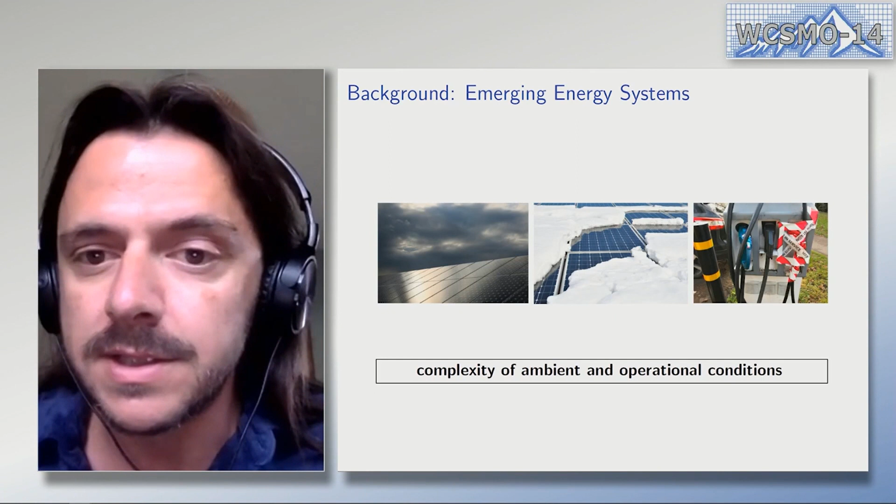But let me focus a bit on the complexities here. The complexities associated with these systems, first of all, are complexities related to ambient and operational conditions. You can think about solar panels that are not completely deterministic, very volatile, and can be affected by weather. And of course, equipment that is out there in the field, such as electric vehicle charging stations that can go out of operation.

The second complexity category is actually the size. If you think about the power network itself, the power network didn't change for a hundred years. But what changed is actually the number of control points in this system. So if before we had maybe thousands of big power plants that we had to control, now we suddenly have to control millions of all these devices that are out there. So size in terms of the number of control points, or optimization variables if we're talking about optimization.

The other types of complexities are related to interactions between different systems or subsystems. You can think of physical systems such as wind farms, where turbines affect each other because they appear in the way of the wind, and the wind comes in different ways to different wind turbines in this wind plant. But we also have interactions with logical systems and with societal systems associated with energy systems.

And in the context of all these complexities, the main research question that we at NREL in my group are trying to answer is how you can control and optimize all these massively deployed edge devices or distributed energy resources in real time. And if you want to read some high-level thoughts and description of this research, you can read this recent article in IEEE Power and Energy Magazine last year.

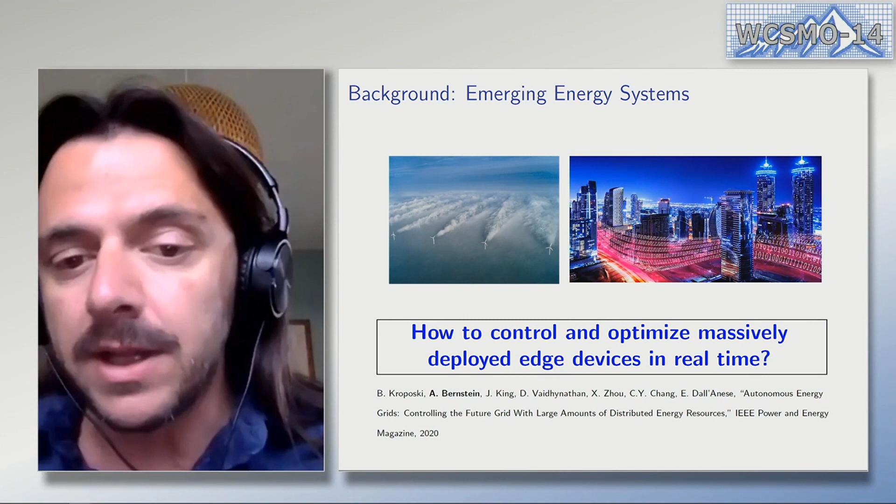But what I will focus on in this talk is really the mathematical foundations related to optimization of such systems. I will start with a really abstract description of the problem, but I will connect to energy systems. I will also be happy to hear thoughts about connections to other systems, because the methods that I will present here are actually general and they apply to any complex system, network system.

So let me start with some mathematical notation that I will use throughout. Consider a general system that can be described by just an input-output relationship like this, where Y is a vector of system outputs, X is the vector of controllable inputs, and the mapping H maps inputs to outputs. In this case, I assume it's a time-varying algebraic map. This can also be extended in general to dynamical systems, but I will focus here only on a simple algebraic relationship between input and output.

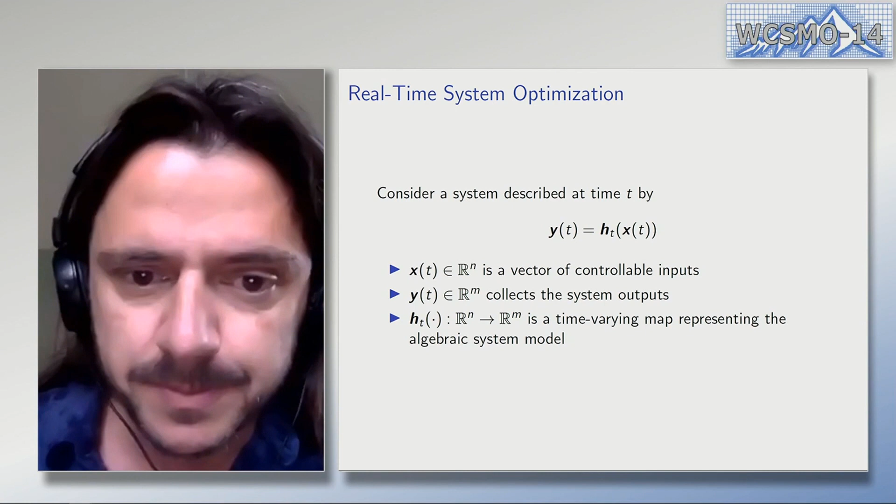To connect to power systems specifically, this is very high level, even for people that don't know anything about power systems, I can give a bit of high-level background here on what a power system is.

What I show here on the left is actually the network, a distribution network, what we call in the power systems world. And this is a power network that delivers power to the customers in the neighborhood, for example, right? So here at the head, at the top, you have a substation that transforms power from high voltage to low voltage. And then the power is delivered to the customers, and each node in this network represents, for example, a house in your neighborhood. Okay, so this is a graph that represents a neighborhood and a distribution network associated with it.

And in this network, you can think that you can have houses with solar panels, electrical vehicles, smart appliances that can both consume and generate power, right? So this is the world of new energy systems where the energy can be generated on the edge of the system, compared to the previous classical power systems world where these systems were completely passive, they were just consuming power.

And in this context, if we want to connect to the mathematical formulation of the input-output relationship, we can denote by X the power that is injected by controllable devices in this network. So basically, a positive number will represent a positive power that is injected into the system, for example, from a solar panel into the network. A negative number will represent consumption of power, the classical case where you have just devices that consume power in your house. So this vector X will represent all these power injections that you can control in the system.

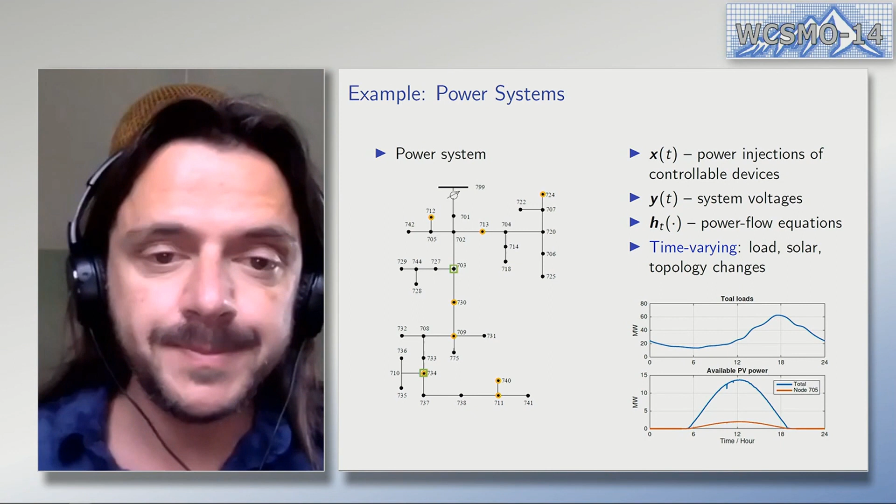So let's go to the optimization question. The desired behavior of such a system, we can abstract the problem. This is, of course, a simplification. We can complicate it as much as we can, but the main ingredients are shown here, right? So what we are trying to do when we do optimization of such systems, we are trying to minimize some cost. Let's call the cost F_T. F is also a time-varying cost. And I represent the cost only in terms of the output Y, but of course, again, we can complicate it and make the cost also dependent on the input.

And in terms of constraints, we have constraints on the input. Here I represent them implicitly using this set calligraphic X_T, and the physics. So Y equals H_T of X represents the connection between input and output. So this would be a typical optimization problem that you can write to define how you optimize the behavior of such a system.

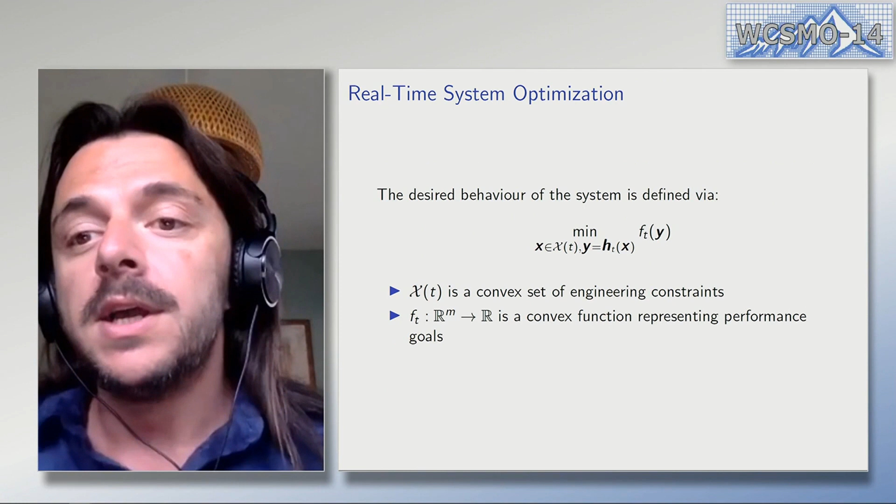But also there are physics that connect voltages to powers, for example, through power flow equations, right? So these are the constraints that we have in this optimization problem. This in the power systems world is called optimal power flow. It's just a name, but this is a very famous name in power systems.

So let's dig a bit into just a straightforward approach to solve these kinds of problems. Right, we have this problem. Again, I just want to emphasize this is a time-varying problem because of the time-varying conditions that I showed, for example. And on a high level, what do we need to do in order to solve such a problem? Suppose that we want to optimize all the power generation from all these millions of devices in the system to minimize the cost, subject to physics. So we actually need to do two main things.

First of all, we need to know the function h. In some sense, we need to know how voltages are connected to powers. In other words, we need to know the topology of this network. We need to know the parameters of all the lines in this system. And then we can construct this function h based on physics laws. We can do it, but this requires a lot of information. And as a byproduct, we also would like to know the Jacobian of this mapping h, which represents the sensitivities of output with respect to input, because we will typically need to compute gradients here.

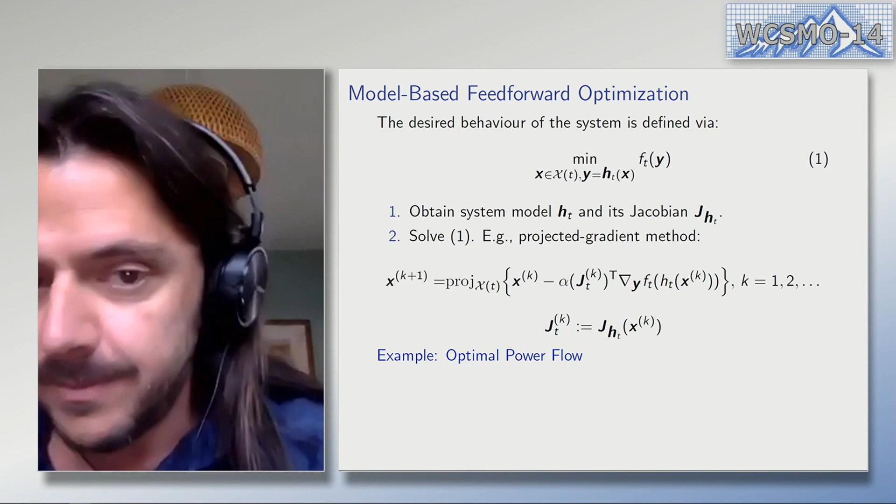And of course, if you have all the information and all the time in the world to solve this problem, you can do it. This is actually what in the power systems world was called an optimal power flow. But in this new world of emergent energy systems, we are coming to the situation where we are not able to solve this problem to convergence, especially in real time. So what I want to focus on in the next part of this presentation is to show ways we can make these algorithms run in real time and with as little information about the system as possible. So these are the two main constraints that we have.

So first of all, how do we do it in real time? Do we have enough time to run this iteration to convergence? For large problems, we probably won't have enough time, because we would like to solve this problem, for example, on a second-by-second basis. This is a typical time scale for variability of solar and load in these kinds of systems. And the second challenge, as I mentioned, is do we have all the information? Do we have the model? What I call model will typically mean just this mapping ht. Do we really have the model information in real time at any given time?

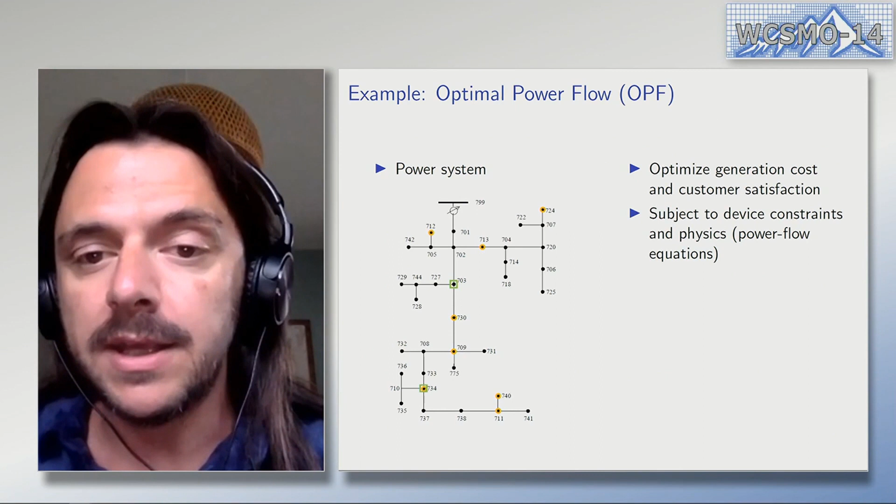And model here means that you need to know, as I mentioned, the topology of this network system and all the uncontrollable inputs at all the nodes. For example, the consumption of your house at any given moment, or when you charge or discharge your electric vehicle, and stuff like that. And topology. The mapping ht represents, in addition to many things, the topology, the connectivity between the nodes, and the parameters of these lines. And in a typical practical situation, you don't have all this information in real time, because of changes in topology, because you don't know exactly the parameters of the lines, and so on and so forth.

So the approach that is becoming more and more popular, which our group here at NREL started looking at in parallel with some other groups in the world, could be defined as model-based feedback optimization. In some sense, this is a marriage of optimization and feedback control in a very particular way that I show here. I will continue for a moment to illustrate these ideas on a simple gradient descent algorithm. I will go later to a more complicated problem, but for now allow me to keep this very simple.

And remember our previous gradient descent algorithm. So the idea here is very simple conceptually. Instead of solving the optimization problem in an open loop fashion, I am putting the optimization algorithm in the feedback to the system, and I am allowed now to measure the output of the system in real time. So this is what I pay for this.

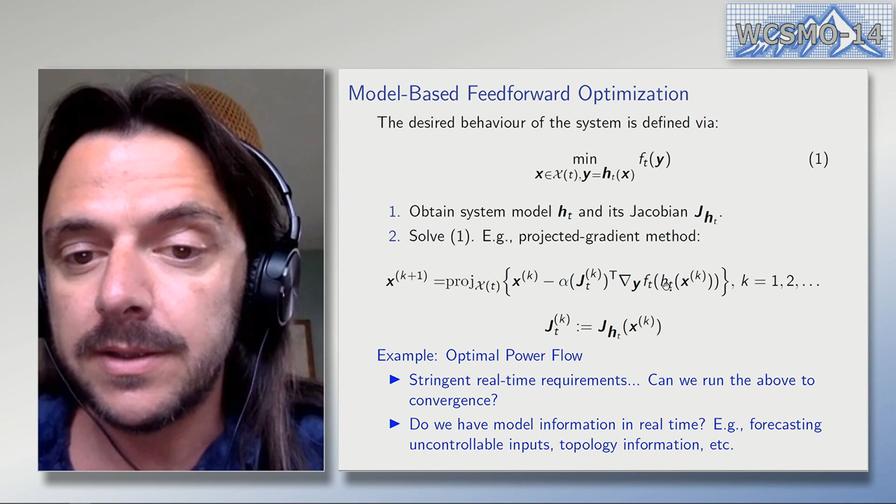But what I gain is that I can replace here in the optimization algorithm the mapping HT with the measurement of the output. Okay, so I just remind you that originally in this gradient descent algorithm, I need to know the mapping HT to run it, right? Now I just use the system itself in the feedback to the optimization algorithm, or if you want, I use the optimization algorithm in the feedback to the system, depends on how you look at it.

And I'm using this measurement and I'm plugging it inside the gradient descent, and I'm doing one iteration per time step. So here, this is an online optimization approach where at every given moment, I'm doing one step of optimization. I'm measuring the output. I'm plugging the output inside the gradient of the cost. And I go further next. And this is kind of an online optimization with real-time feedback to the system.

And as you can see, this allows me to avoid, I don't need to know the mapping HT, let's say, right? Here, I pay the price, of course, that I need to measure now the output, but I don't need to know how X is related to Y directly or explicitly, which means that for example, I don't need to know in principle the topology. I don't need to know the uncontrollable inputs such as power consumption at the different houses. I just need to measure the output.

And I remind you that in our case, the outputs are, for example, the voltages at selected locations in this network. So I can measure the voltage, I can act on the voltage, I can produce a new controllable input, then again, I measure the voltage and so on and so forth.

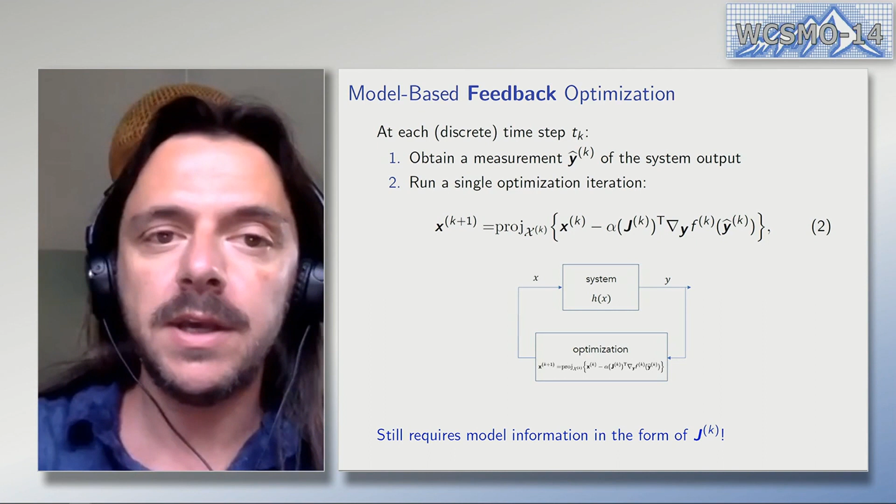This is a bit less of a requirement, right? Because this just means that I need to know the sensitivity with respect to controllable inputs. I don't really need to know the uncontrollable inputs. I don't need to know other things, but still it requires some significant information about the system in terms of this Jacobian. So this is still in between, right? It's kind of in between a completely open loop model-based approach and a completely model-free feedback approach. So this is just to pay attention here.

So to move to a completely model-free world, what we can do is really move from gradient-based algorithms to zero-order algorithms, right? So this is what I will show next. And the idea is, again, conceptually simple. Okay, I have this function, right? Remember, this is a composite function. I have a cost F of the output of the system. H represents the output mapping. Eventually, it's a composite function of X.

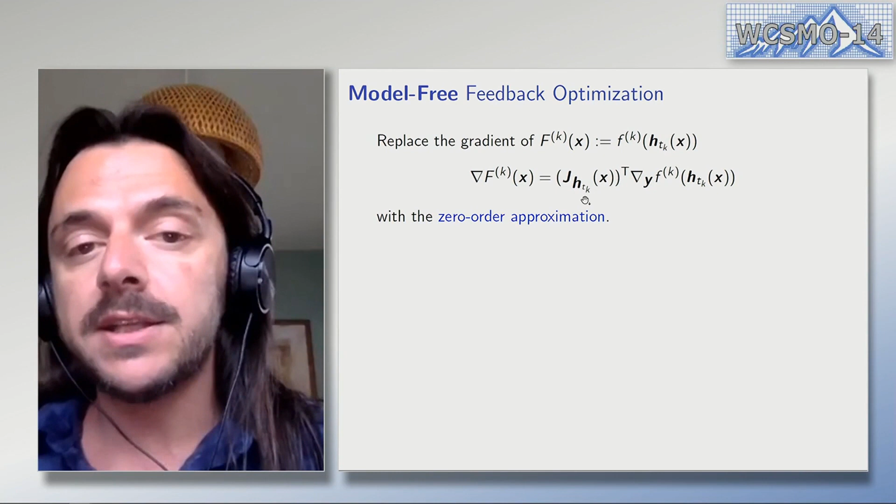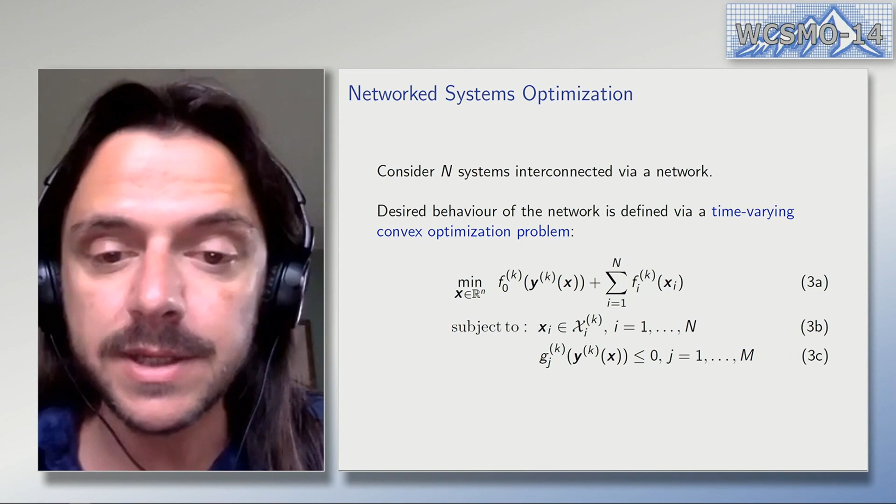Okay, so now we have this more complicated problem. Obviously, we have some constraints here, such as 3c, that we would like to dualize for obvious reasons, right? Unless we are able to project on these constraints, we will not be able to solve this problem. So what we are doing here is going to the primal-dual formulation, and we are defining a desired trajectory of this optimization problem. Notice again, I call it a trajectory because I have a time index k.

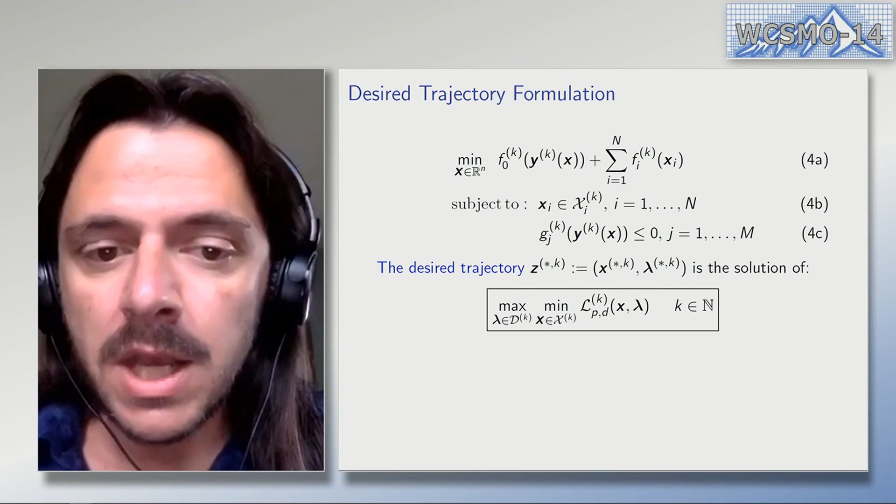Obviously, for each given k it is just a desired solution of this optimization problem. But this is a solution of the max-min associated with this optimization problem. And L here is a Lagrangian associated with this optimization problem. So in this specific formulation, I dualized this constraint 4c. I didn't write the Lagrangian, but I guess people understand here what Lagrangian means.

The only thing that I want to point out is that we are not using the straightforward definition of the Lagrangian, but we are using the regularized Lagrangian, which of course shifts the solution from the optimum, but it has these very great properties that we can enforce regularity here, right?

I should have said originally, of course, that all the elements here are convex. We assume that the functions are convex, the constraint functions are convex, and the sets are convex. And if they are not convex in the original problem, we have to convexify. So in problem 4, I assume that it's a convex optimization problem, but it is not necessarily strongly convex.

So if it's not strongly convex, I can add this regularization term for the primal variable x, norm squared. And I am also adding a strongly concave term in terms of the dual variable to make the Lagrangian strongly convex, strongly concave. And this is for the purpose of designing the algorithms. Of course, this shifts the optimum, but we can control this shifting by controlling P and D. So if we set them small enough, we will not be too far away from the optimum.

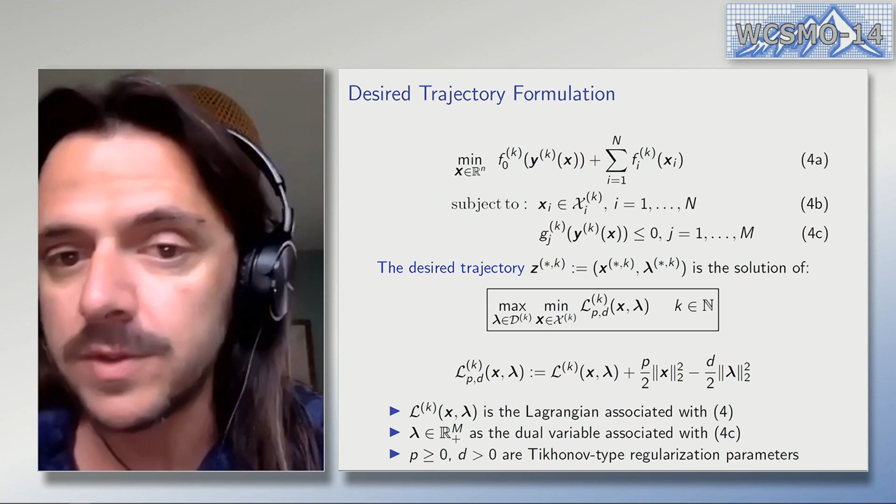But if I add these terms, I will have much faster convergence because of the strong convexity, or strong concavity in the dual variable. So using this formulation, I can now define a first-order primal-dual algorithm to solve these kinds of problems. Again, this is a first-order algorithm that is based on measurements of the system output. Again, this is a feedback-based approach.

So what this algorithm does is described in these steps. First of all, at each time step k, we apply a given input to the system, xk. Then we collect the measurements of the outputs. Remember this y hat. Then we compute the gradient of the Lagrangian. Notice that this gradient of the Lagrangian depends on the measurements of the output. So this is a feedback-based approach.

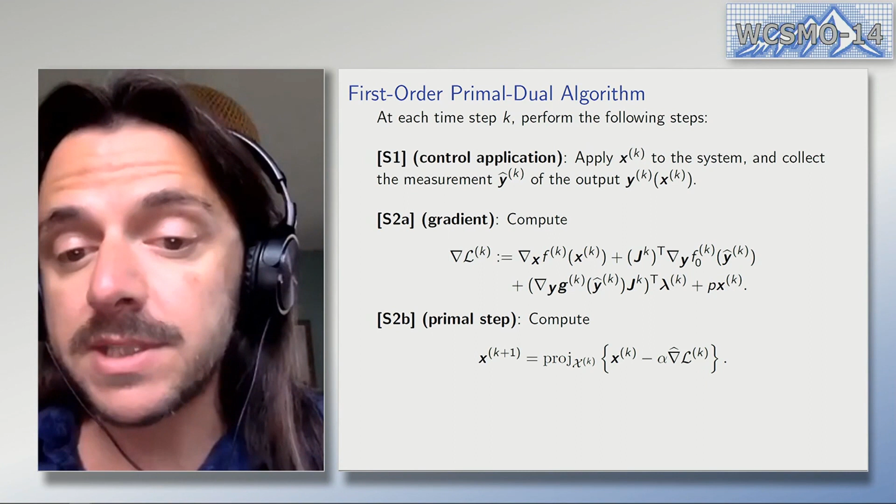Then we compute the primal step, going in the direction of the negative gradient of the Lagrangian. And we compute the dual step, where we go in the direction of ascent in the dual variables. So this is just a simple primal dual algorithm applied to the regularized Lagrangian. Notice the regularization terms here and here, but with feedback, right?

Again, I just want to emphasize. These blue parts represent where I insert the information from the system output, y hat. It's as before, right? Before that, we had just the gradient descent. Here we have a primal dual algorithm, but things didn't change much. We just insert the feedback where we need it inside these two updates, in the primal update and in the dual update. There is a hat here, supposed to be here as well.

The hat here appears because we assume that we measure the output, but the measurement, of course, is not necessarily exact, right? So there might be noise. If the measurement is exact, then you will have an exact gradient here. Otherwise, this is an inexact gradient.

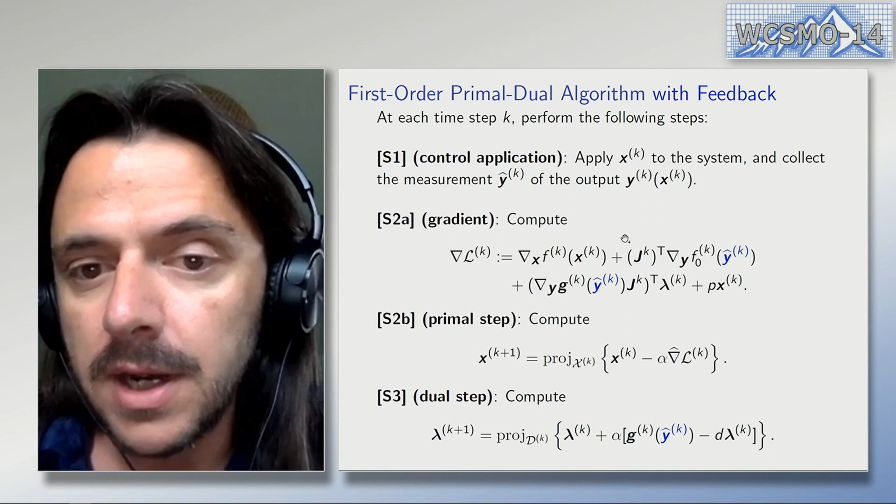So let me just take this algorithm and convert it to the zero order method using the two function evaluation approach that I mentioned. And the only place where we need to do it is actually here, in this gradient, J. Here, we still have the problem with J. We need to know the Jacobian of input to output. And we do the following. Again, it comes at the expense of more measurements.

So in the first step, we need to apply two inputs to the system, one with plus delta and one with minus delta. And then we can collect the corresponding measurements. I assume that we can do it fast enough, and I don't change the time index. So I can probe the system in the same instance. Of course, it's an approximation, but to make it less complex, I assume that you can do it at the same time.

And then we approximate the gradient with a zero order method. It's just what is written here. We have this signal xi k. Remember, this is the exploration signal, two-function evaluation for the primal part. So this is the objective function, remember, the F0. But we also have the zero order approximation for the dual part, for the constraints. But this is the same. And primal dual steps remain the same. Nothing changed here. The only thing that I changed is how I compute this gradient.

And this algorithm is completely model-free, right? So I have a system, I probe it 2 times, I do 1 iteration of the primal dual algorithm, I go to the next time step, I do again the same thing, and I don't need to know anything about the physics of the system. Of course, explicitly I kept X because these are the constraints that I assume that I know, such as, for example, if you want to optimize your solar panel, you know that you cannot go above the rated power of the solar panel, or if you have an appliance, it has some rated power that you cannot exceed. So these things we know.

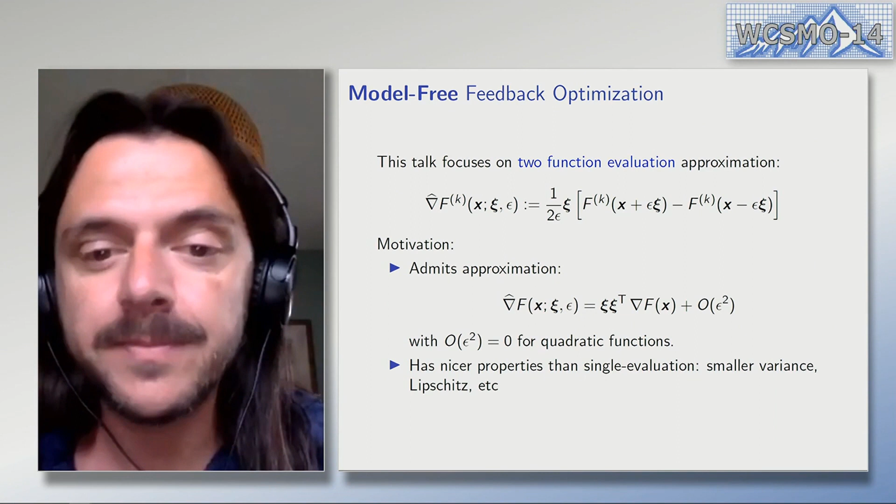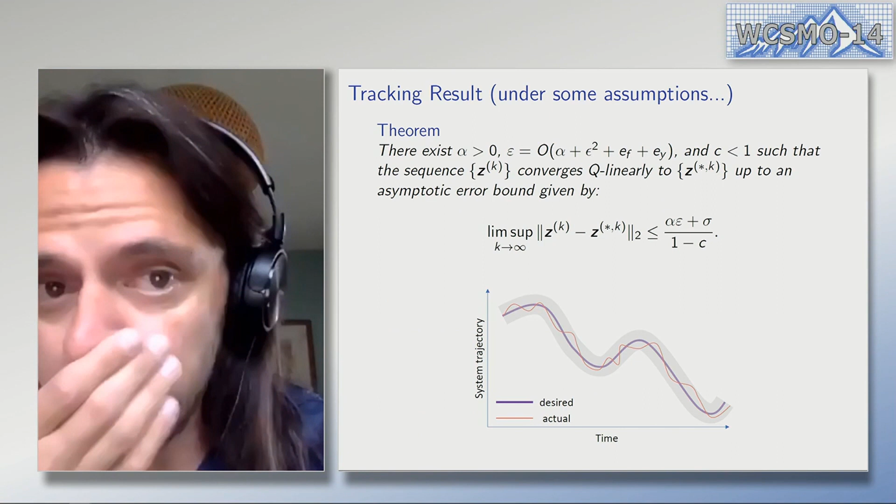And finally, for this analysis that I will present in a second, we assume that the measurement error, remember we measure output, is bounded by some quantity EY. There is also an option to do a stochastic analysis for noise, which I will not cover here, but here we assume deterministic noise.

So this is just a flavor of the results that you can obtain for these algorithms. Again, under some assumptions, I listed most of them on the previous slide, but the flavor of the theorem is the following. You can find a step size. Alpha is the step size for primal dual, right? So this is just a constant step size here. You can find the step size such that your trajectory, Zk, the primal dual pair at every given time, is not far away from the optimal primal dual pair, which is Z star K.

And the bound asymptotically is given by this quantity, where this epsilon here is of the order of these different things that we defined. First of all, the order of step size, since we're using a constant step size, it will appear there. Of the order of this epsilon squared. Epsilon, I remind you, was the magnitude of the exploration signal, so we need to control that exploration signal as well. EF is the variability of the gradient, and EY is the error in the measurement.

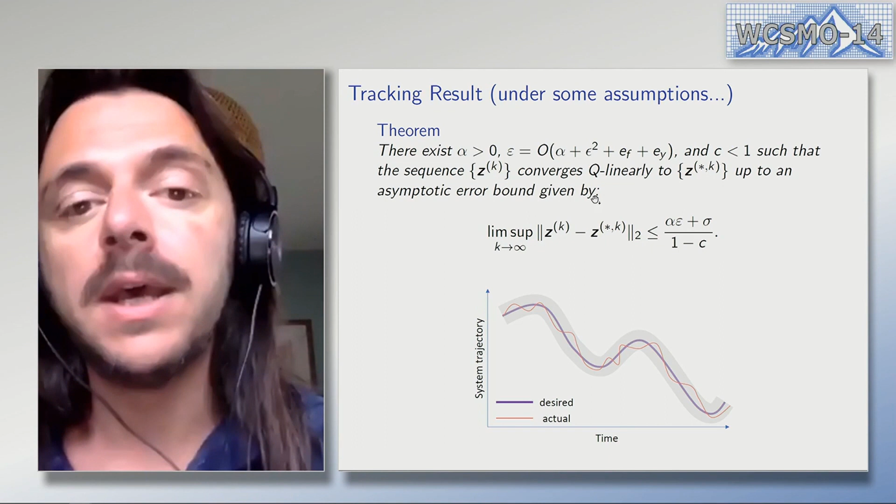And C eventually will be less than 1. So basically you can choose alpha so that this C is less than 1. So then this is a standard geometric series eventually when you analyze this. And the convergence is, so this is an asymptotic bound. So this is a neighborhood in which the trajectory will oscillate, but the convergence rate is exponentially fast, or Q-linear if you want, because of these regularization terms. So yeah, that's just a flavor of the results.

Let me go over the application. Since I'm not sure how much people here know power systems, I will try to give you the essence of this application. I think I tried to give it in the beginning, but the idea is very similar. So what you see here on the left, you have this distribution system. Think about it as a neighborhood in a city, 123 nodes in this system. In this particular system, we had 8 solar systems distributed here, as shown in the figure, and 3 battery systems. And you can see also switches here.

So notice this is a topology, but the topology can change at any time during the day because of some reconfiguration requirements, which are out of our control, right? You don't know in advance that they can happen. So what we're trying to do here is to show how our algorithm can adapt to these changes in the reconfiguration of the system, as well as to unknown elements here, because of course, in addition to 8 solar panels and 3 batteries, there are also 123 uncontrollable elements here. And I will probably skip the definitions. These just define mathematically what we would like to do.

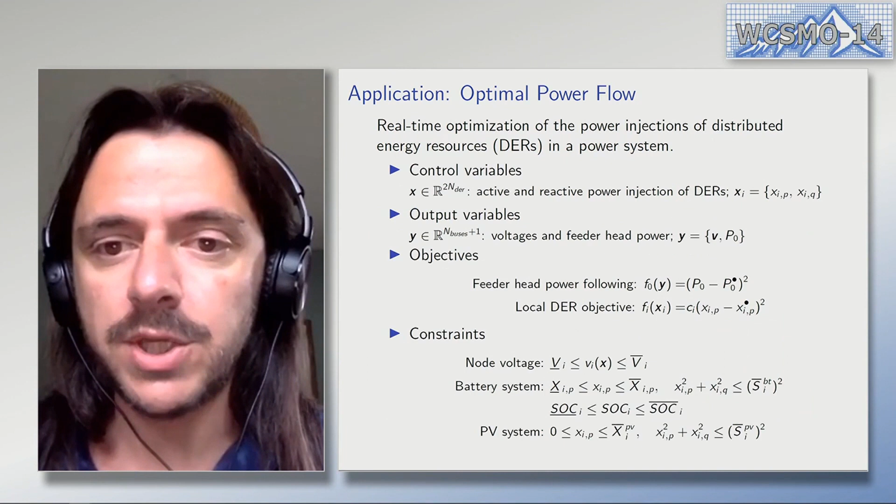But while we do this, we also want to respect all the electrical limits. So for example, here in the system, you have voltages. These are the outputs also in the previous formulation. And we would like to make sure that the voltages are within prescribed bounds. So here you have constraints on the output, as I mentioned in the abstract formulation. So this is all described here. What I want to show is really just some plots here that show how it works.

So here on the left, you see the uncontrolled power that is consumed by the system at any given time during the day. And this tells us the total power, basically the power at the connection of this neighborhood to the higher level grid, the aggregate power. And you can see here two networks, network 1 and network 2. Actually, we had two different configurations of the network during this period, which means the system changes during these instances.

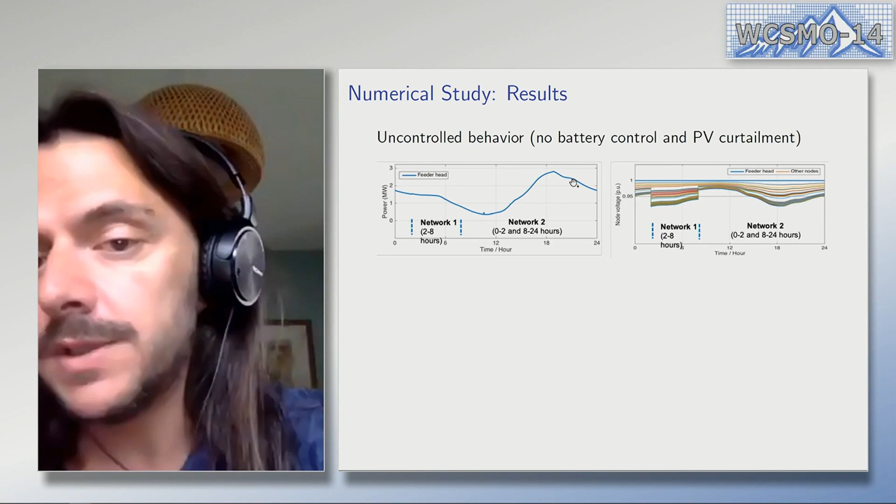And the voltages of this uncontrolled system are shown here. These are normalized voltages. 1 means nominal voltage. Anything below 0.95 means bad, so the voltage goes below the limit. And you can see here that during the reconfiguration to network 1, the voltages actually went below 0.95, which means there was a voltage violation, which is not a healthy network. And similarly, during the period of network 2, there was a voltage violation because of high demand. Basically, when demand is high, the voltage goes down. This is, roughly speaking, the rationale here. So if there is no control, you will see voltage violations during 2 periods of time.

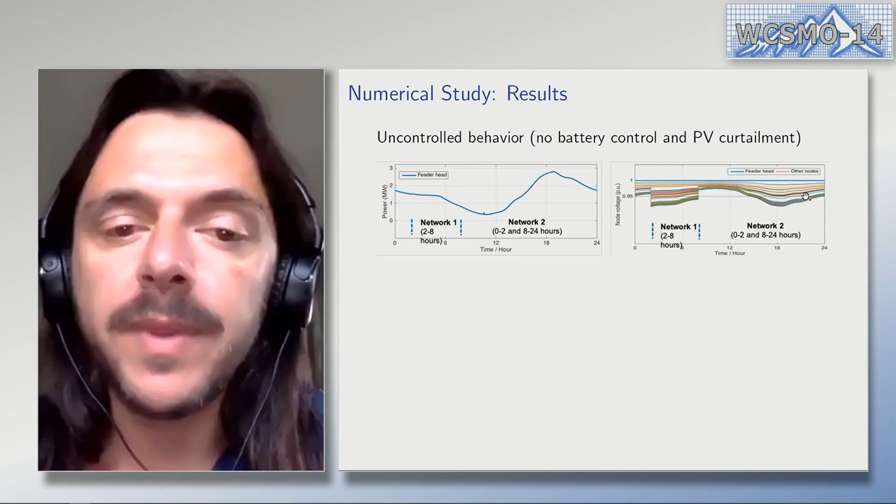And what we did here with this real-time model-free optimization, we did 2 things, as I mentioned. First of all, virtual power plant. So what is a virtual power plant? I'm just saying, okay, I don't want to see this total power anymore. I want to see this total power. And this signal comes from the utility, from the system operator, because it wants to dispatch this power system to a given prescribed power. So you can see these 2 lines here coincide, the reference power and the actual power.

So what is said here, feeder head, sorry for the terminology, feeder head means just the actual aggregate power of this distribution network. So you can see that the power is dispatched to a given value, here to a lower value, and here to a higher value. And in addition to that, simultaneously, we were also able to regulate the voltages within bounds. So during this period, you don't have voltage violations anymore, and during this period, you don't have voltage violations.

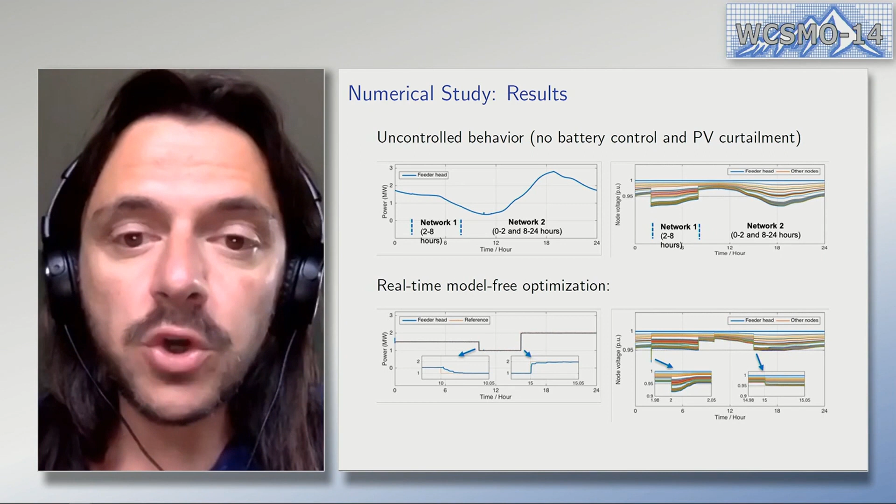So that's, yeah, I think I will skip this. This is a bit of a sensitivity to noise. As you can imagine, these methods, based on measurements, are very sensitive to noise. Below some threshold, you can still do things. If the noise overcomes your exploration signal, right? Because in this model-free approach you need to explore, but if you have too much noise and the exploration signal is too small, then eventually you will not be able to explore. But I will skip that.

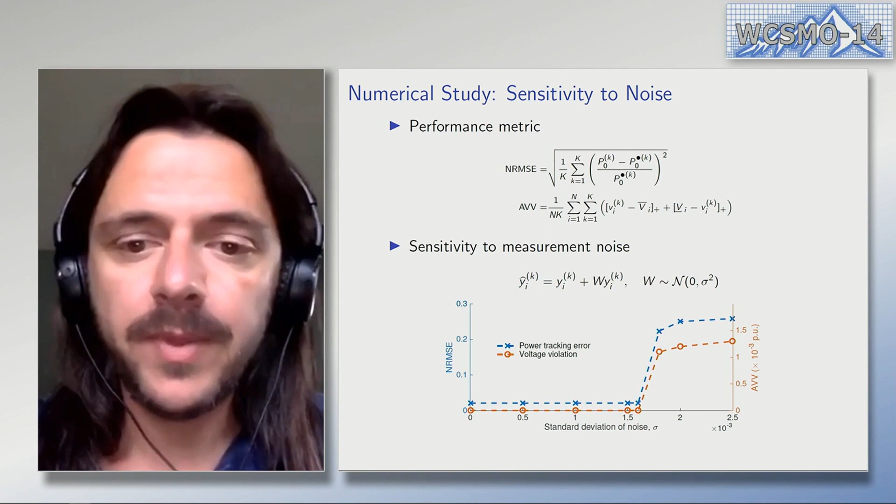Okay, so that just summarizes this, right? So what I presented here was real-time primal dual methods to track desired trajectory of general network systems. Again, the application that we had is power systems, but you can think of similar approaches for other systems, which are connections of different systems in the network. We proposed this zero-order deterministic feedback-based approximations, showed some stability and tracking results, and applied to this optimal power flow problem.

So I would like to finish maybe in a couple of minutes, really, just to give you a flavor. What else did we do? Of course, this is all theoretical, very nice in simulation, but I wanted to tell you that we actually went and implemented this in the field. And this I will do really, really fast. So at NREL, we actually have different ways to go with different technologies and implement in real life.

The first simple step from the simulation world is what is called power hardware in the loop, where you take your algorithms and you implement them with real devices in the lab, but with some co-simulation of the other system, right? You can simulate the power system, you can simulate millions of other devices, but you also will have some real devices working in your lab in that co-simulation and emulation environment.

So this is a very unique experiment. We had more than 100 physical devices with a realistic feeder from California, where we were basically coordinating all of these devices for similar things that I showed in the simulation, such as virtual power plant and voltage regulation.